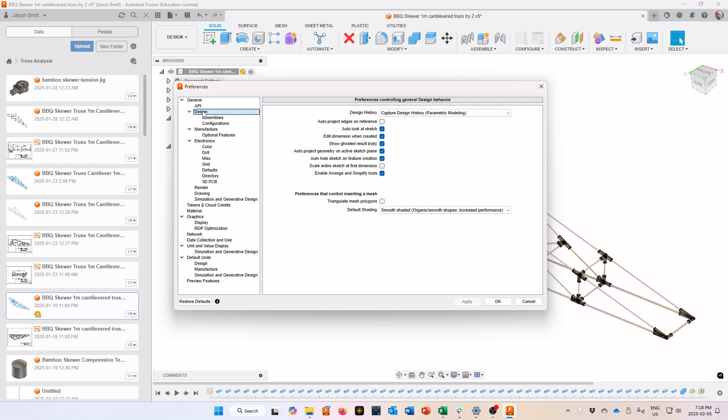First, for design history, make sure you've got capture design history turned on. You've got a few different options here, but you want this to be your default for all your drawings because that unlocks a lot of the power of Fusion 360.

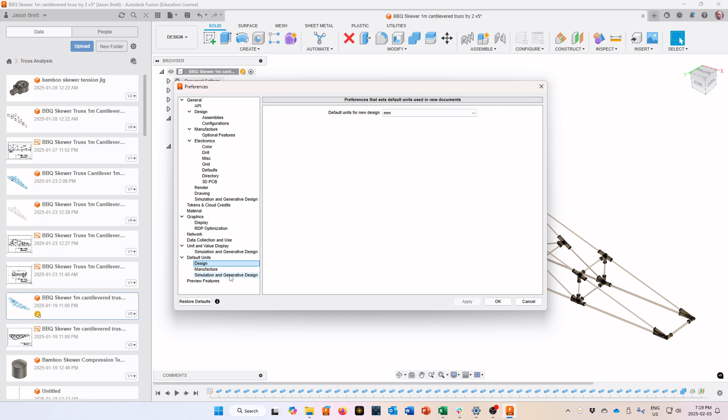Then down at the bottom, for your default units in the design environment, tell it you want to design in millimeters. That's what we're going to be doing. Double check in the simulation and generative design that you're set up for metric units, because that's what we're using for this project, because Imperial sucks.

Okay, let's carry on. You've got all those set up. Now you're going to need to know a little bit about how to maneuver in the Fusion 360 environment.

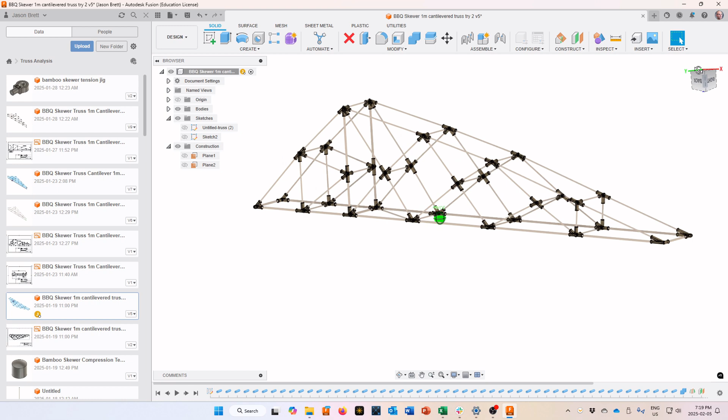Up here in the top corner we've got something called the view cube, top right corner. The view cube is kind of like a little building block that sits in the 3D space of Fusion 360, and you can pick it up and drag that building block around. As you do that, whatever angle you look at your building block from, that's what you're looking at your project from.

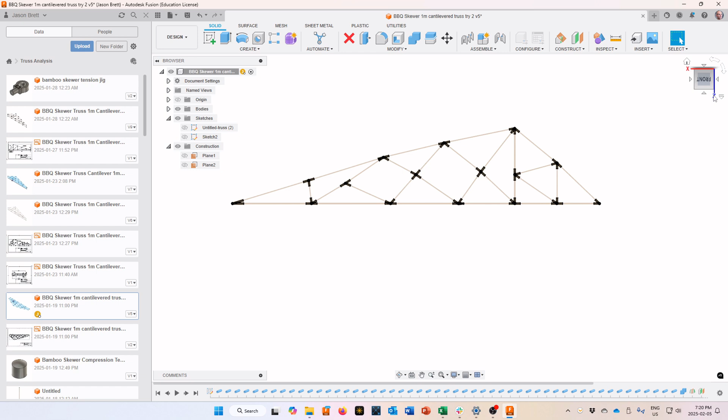If you want to look at it from the front, you can click on it right there. Now notice my front is upside down—I've got named axes in here, I'm in the XZ plane right now. You'll see why my truss is shaped the way it is. Technically, there's the actual front.

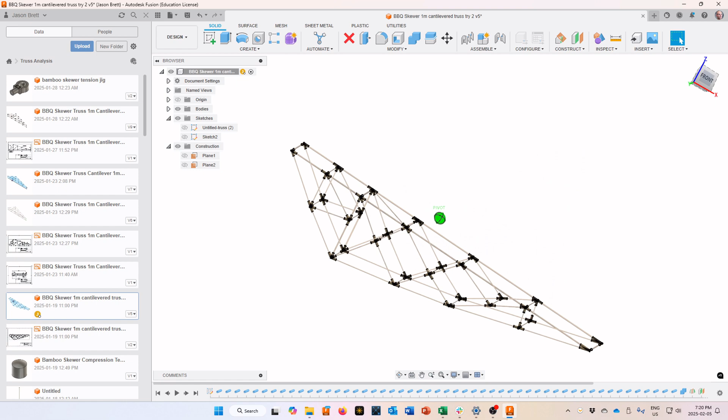If you click on these little sides, that brings you up to a top view, and you can rotate around and get all these different views. You can even click on the corner and get a nice little view up there. Again, you click and drag on that and rotate it into the position you want.

Okay, now that's one way to move things around on your screen. You can also come down to the bottom right here—there's the orbit command, and orbit just lets you pick it up. I'm just using my main mouse button, the left-hand mouse button. I'm not doing anything fancy here.

The middle mouse button lets you zoom in and out, so I'm just rolling it back and forth. The right mouse button is one you can use for picking up different commands—it's not going to help you move around all that much. When you've decided you're done orbiting, you can hit escape. So that's a little bit about how you're going to move around inside this environment.

Over on this side, this is all of your files. The files are stored out there on the cloud—Autodesk takes care of all that for you.

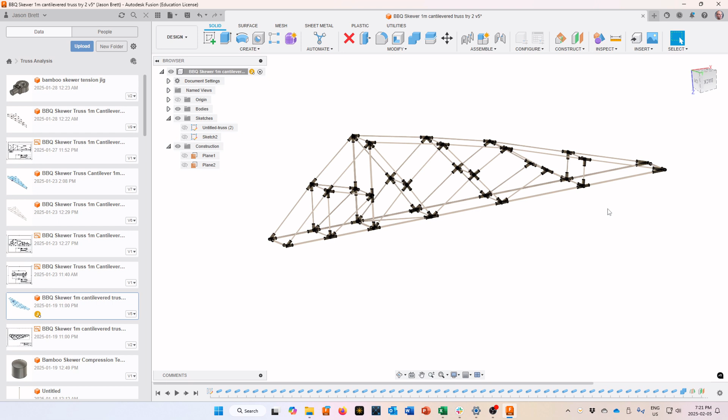But you're going to come in, create a truss design like this, and ultimately we're going to go into the simulation environment. So we start out in design, then we come into simulation. I've already analyzed this one and I've got some results for it. Yes, the results are out of date because I changed the design after looking at my results, but it's going to open up those results for me.

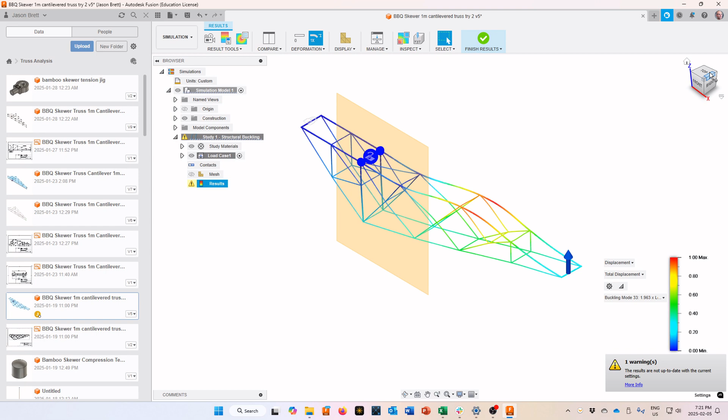Let me just spin that back around, or use my orbit to fine adjust where I want it to be. I happen to have a 3D mouse on my desk, so I can just pick it up and spin it around like that, which makes it really easy for me to look at things.

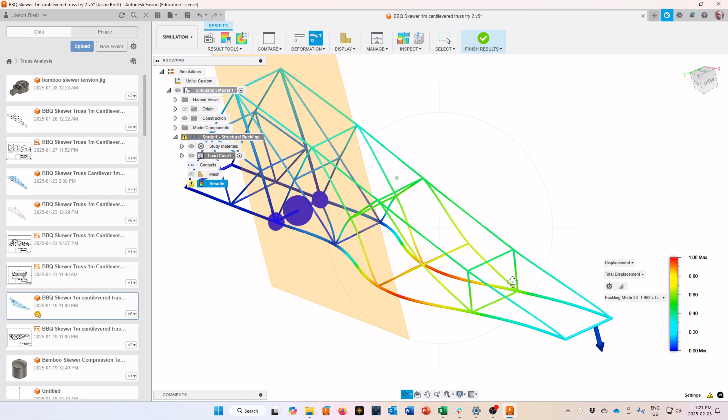If you're going to be doing a lot of 3D CAD, oh my goodness, do I recommend a 3D mouse—they're so cool. You can see right here, this is a structural buckling analysis, and it's telling me that it's going to swing out to the side right down here in the bottom.

If I look at it like that, you can see that big sway coming off in the bottom. So anyway, we're going to figure out how to get there.

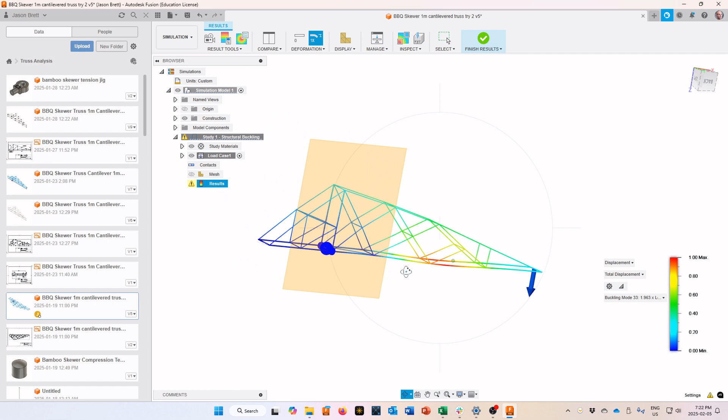Let's come back to our design environment. In here we're also going to take a look at how to build these nodes that we're going to end up printing, and then we're going to kick them out to our slicer program and get them ready to go on a 3D printer.

Let's see, what else do you need to know in here about what we're going to do? Your files are over here. This section is useful—this is your browser, and it keeps track of everything you've done. So I've got bodies in here, and I can turn these bodies on and off.

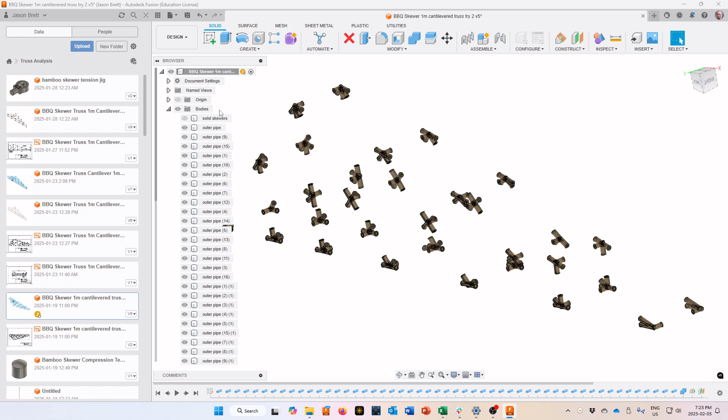For instance, I've got solid pipes—those are my solid skewers. So if I just want to see all of my individual nodes, I can turn off the solid skewers. Again, if I just want to see the skewers, I can turn off the nodes. You can do all of that right in there under the bodies with the drop-down menu.

You can also see some of your sketches. If I come up here to the bodies and turn that off, you can see the 3D sketch that I used for creating everything. I'm going to guide you through this and show you how to do all of that.

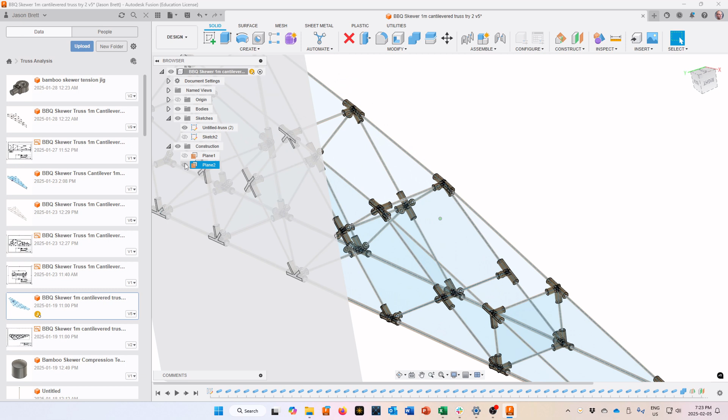We've got construction planes that we use for putting things together—a plane right here that we use for creating all of our parts. So anyway, don't worry about that. If you've never seen them before and don't know what you need to do, we're going to show you how to do all of that.

Grab that view cube, spin it around, and try getting used to it. That's a weird thing that happened there—give me my 3D mouse back.

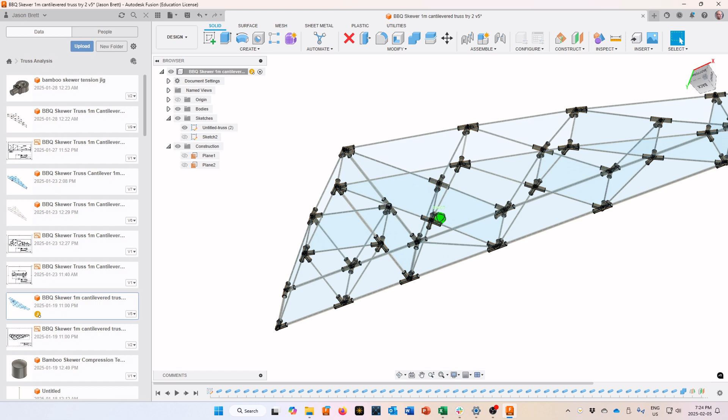Okay, so when you're done with your file, or when you just need a break, hit save or save as, and then you can close it up right at the top. Sure, I'll save those changes. What's really cool is when it saves your changes, it saves it to a new version—you can see on this side where I've got all my files that I am on version 6 of that file right now.

But now it's time to start a new file, because this is what you're going to be doing. In a previous video, we created a truss in TrussMe, and it had some ballpark ideas of what we wanted our truss to look like. We saved it as a DXF, and we're going to start from that sketch.

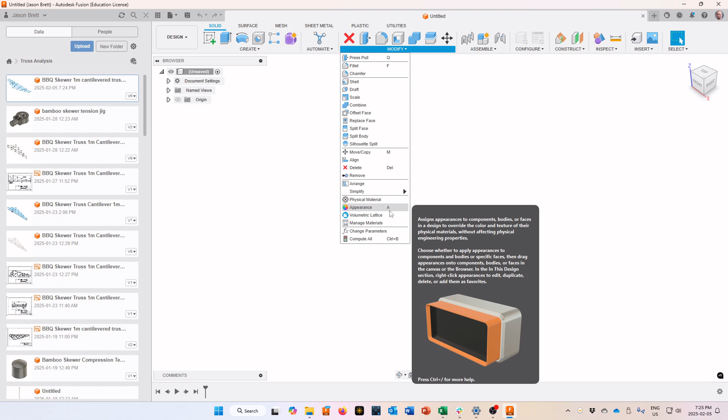Now, before we do any of that, come into the solid environment, and under Modify we've got a whole bunch of tools in the drop-down menu. Come down here—we are going to change our parameters.

We're going to use these a little bit later on, but we're going to be using a thin pipe and a thick pipe—a thin skewer and a thick skewer, I should say. If you click on the plus right here, I am going to call this 'thin skewer'—got to make it all one word.

And you've measured the skewers—you know how big your skewer is around. Take your data. I'm putting 3.2 in here for my thin skewer. I think that's a bit generous, maybe they're closer to 3.1. Again, the better the data you put in, the better your results are going to be.

Now I'm going to put one—I shouldn't call it 'thick skewer' because that looks too much the same. I'm just going to call it 'big skewer,' that way they both start with a different letter. Oh, sorry, I hit enter too soon.

Come back here, change parameters. I didn't put a value on that, so it didn't save. I'm going to call it 'big skewer'—don't hit enter until you're done. Hit the plus button, Jason—you're adding them. Big skewer.

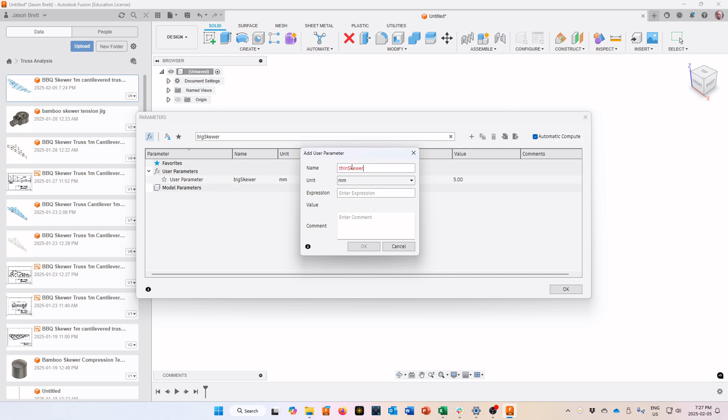Where did our thin skewer go? Thin skewer should still be in there. Did I not do that properly? I think I hit enter too soon. Oh, it must be in there because it's telling me I'm not allowed to use it. Big skewer.

Well, this is less graceful than I'd intended. Maybe I'll edit this part out.